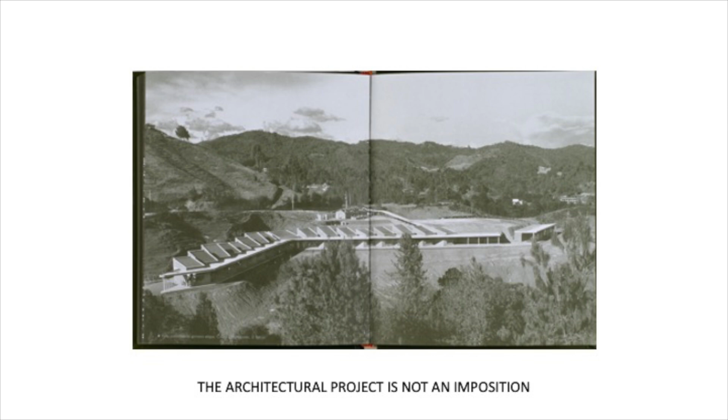It's just the title of the book, Partial Agreements, or Acuerdos Parciales in Spanish. It's proposing or supporting this idea—because it's not our idea, it's more a tradition in architecture—that understands the architectural project as a partial agreement. It's something you have to build with all the people, the ecosystem, materials, situations involved in a specific condition. So what we're saying is the architectural project is not a configuration that we imposed, it's not about our preferences or creative freedom. It's more about a creative commitment with the specific problems you have in that specific moment. The ideas in that book move around that.

The second book was published in 2014, and we had a second publication in 2023. We reprinted it and corrected some of the text, improved it a little bit. But it was just a continuation of that previous idea of partial agreements. So yes, the architectural project is a partial configuration, an agreement, but specifically when that project is located

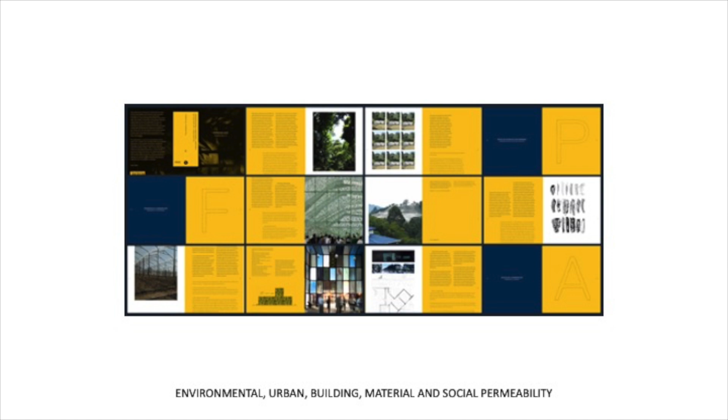inside the tropical belt, or maybe in Colombia, the main quality is permeability in different scales. Why? Because you don't have seasons, you don't have snow. Depending on where you are—Bogota, Medellin, Cartagena—with these different heights, you need different strategies. In Medellin, for example, we don't have this tradition of having AC systems. We don't need it, we don't use it. Only hotels for tourists have those systems, but the rest of the city doesn't need it. So in this book, we try to explain this idea of permeability in different scales as a quality.

So from the urban condition, with examples of how our city is permeable in some areas. When a city is permeable you can walk and cross it, it's different when you have a lot of fences and it is closed. You have different problems or situations, but also environmental permeability, in buildings specifically cross-ventilation, balconies, terraces, all those kinds of spaces, but also materials, how materials can be permeable or porous, allowing humidity or water crossing, etc.

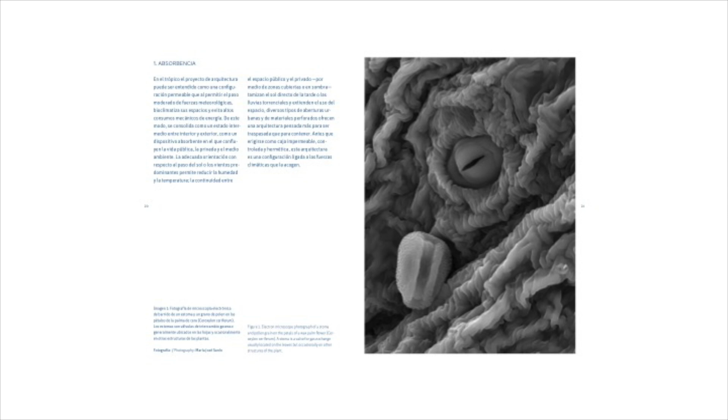Finally, social permeability. For anthropologists it's super relevant, and they define some of the groups they study in terms of how permeable and connected to other communities they are. They connect this idea of permeability with success and surviving over a long period. So we propose a different point of view to understand that concept.

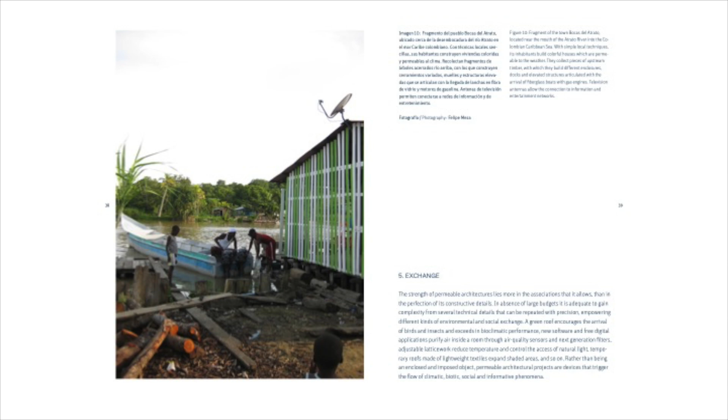So absorbency at different scales. You see the images with different scales. So penetrability, flexibility at this scale, for example, a tropical greenhouse in the mountains of Colombia. So flexibility, availability, exchange, circularity, and convergence. Different scales trying to explain the same phenomena.

Finally, this third book is 12 projects in 120 constraints, and the main idea here is another step, okay? So yes, partial agreement, yes, in the tropic, a permeable agreement, but also in our context, our socio-political context, Latin America, etc., with the history we have and the technologies we have, the limited innovation we have, etc.

We also wanted to accept and understand constraints, but not as we normally do, right? Because constraints, normally we understand them as something that is limiting our capacities or creativity or ways to react to our problems.

So we propose to understand these limitations, these constraints, as a positive expression of the problems you have. In a way, the architectural project is an expression also of those constraints, and maybe our responsibility is to accept them and transform them into creative problems or creative challenges.

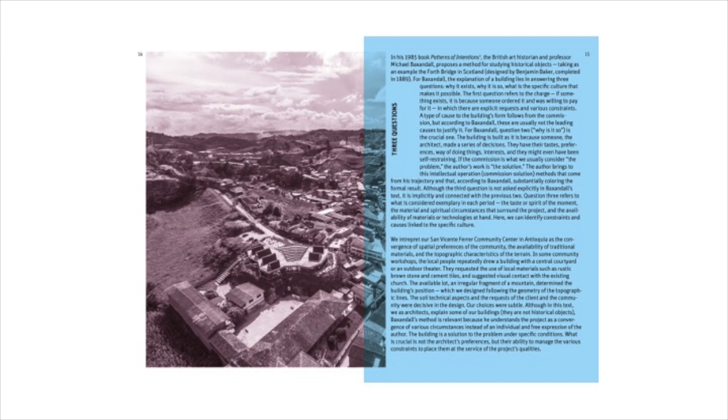So in this case, we analyze the work of other artists, architects, anthropologists working with this idea of constraints. And we have different chapters analyzing the situation: 7 crutches, 5 obstructions, 3 questions, 3 methods, 1 concept, 1 direction, 1 vow of chastity, etc.

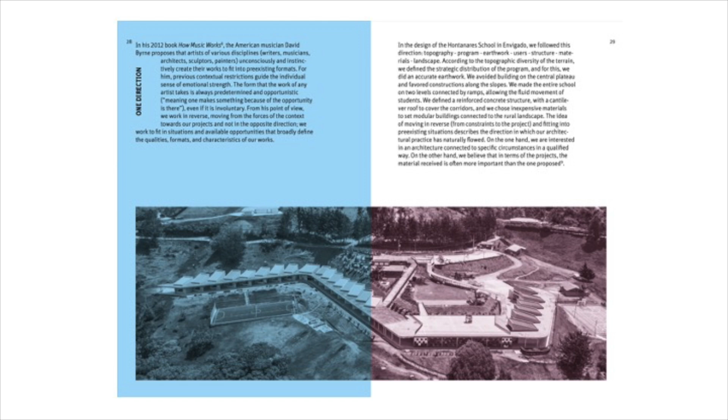So now I'm going to try to explain. Sometimes it's difficult to do it in a super obvious or direct way, but how those ideas are defining or living in these projects. So the first project, I will start from the sea and go up, and I will finish on top of the mountains, right? So you can really understand the projects, and you can see the change of colors, the change of materials. Sometimes it's subtle, sometimes you can really see it, even in the configurations, etc.

There is a street, they have really interesting urban strategies. This public street works as a pedestrian street all days from 5 a.m. to 12 p.m. for people to walk. It is a touristic city, but it works like that. Bicycles, people running, people walking, a lot of festivals, food, etc.

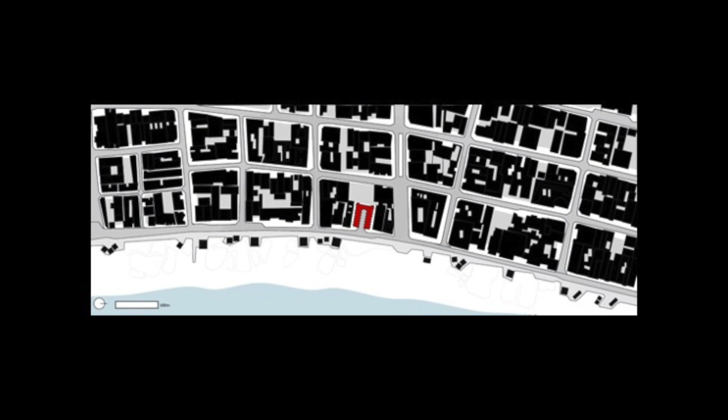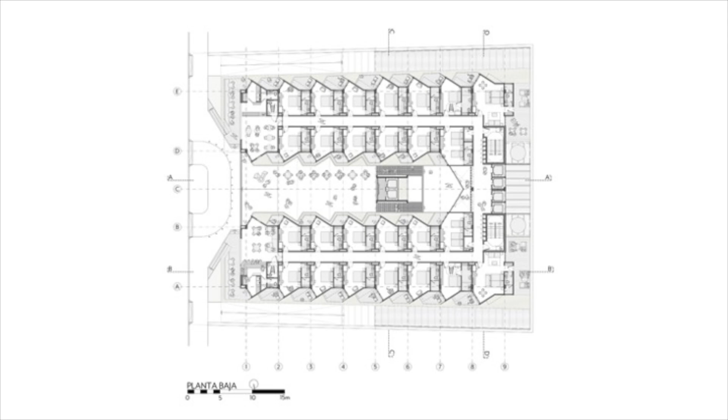And then what we have is a symmetrical building with all the bedrooms arranged with these diagonals, allowing people to see a fragment of the sea. So it's a configuration with this semi-public big space, and then little units with this idea of having the diagonal allow people to enjoy the view.

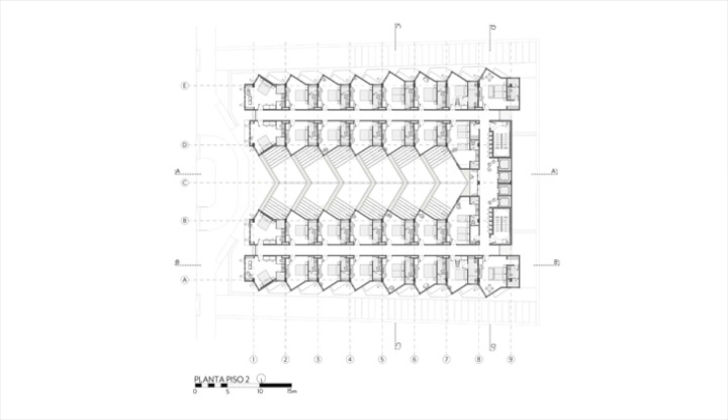Then this space transforms into a big metal pergola with hanging gardens, and on the fourth floor you can take a bridge on top of those pergolas to go to these terraces, to the swimming pool or the restaurant, enjoying the view.

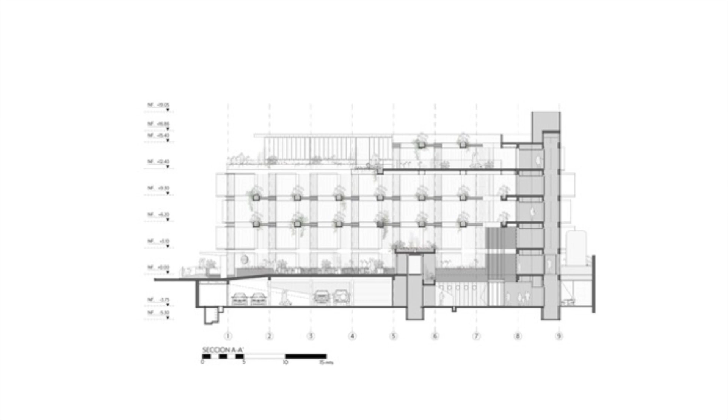So this is like a section. You can see how it's connected with the street. This is the stair you go down here. This is the lobby, etc. Here's the cross section, and this is the building.

So what was the challenge there? What is the constraint? A lot of urban regulations - but the main constraint is cultural preferences of the clients. It's difficult, and we don't take the position where you as architect have to educate your clients. I think it's completely the opposite - we don't educate clients, we work with them. We create agreements, we don't impose. That struggle is where you really have to define the project.

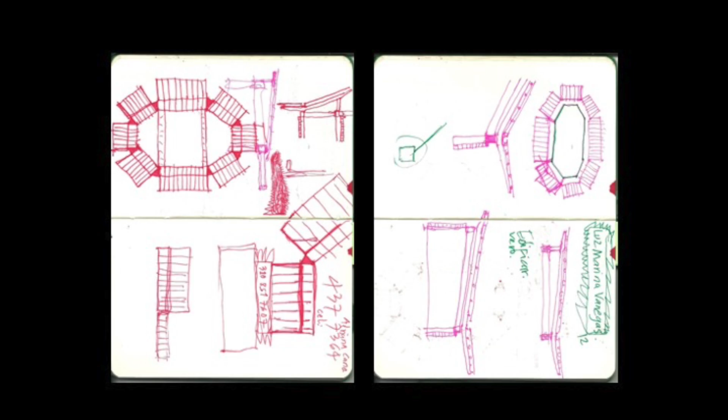The Secretary of Education had a lot of constraints in terms of budget, materials, and structure. For example, the quality of the soil was really, really bad, so they said: concrete structure, only one floor, only one story. The roofs, super light steel, really light. And basically, that's it - make it modular.

We have a partner who is a company building concrete blocks really near this area, so we are going to use all the materials and colors they have - brown, yellow, orange, that's it, thirty-thirty-thirty, and that's it. We are used to those situations.

So we start designing, and they had a soccer field, and one of the main limitations or constraints they proposed is: you have to keep the soccer field exactly where it is. So try to build everything around, keeping this super big space open.

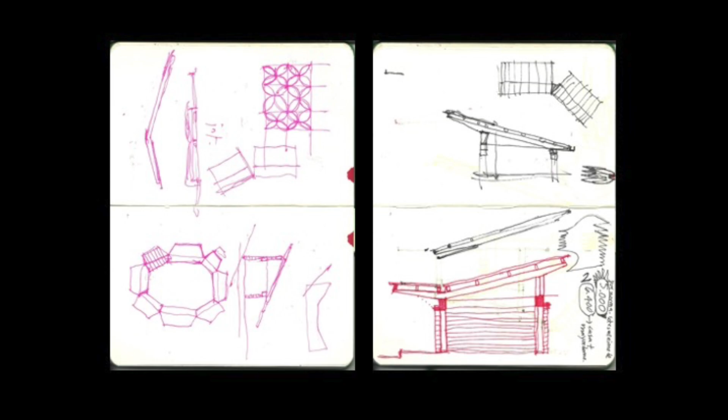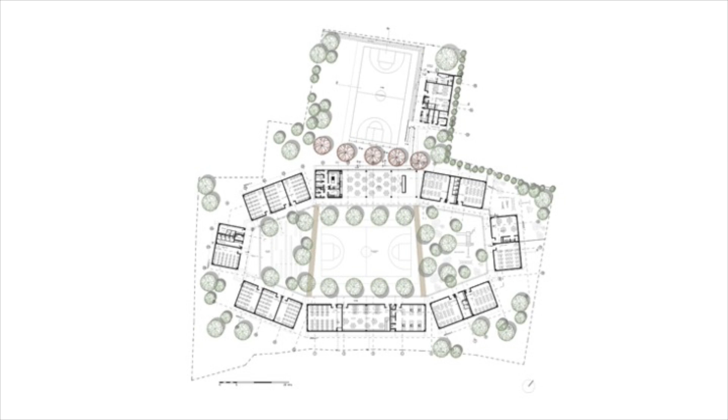So we start working with this idea of having modules. This is the access, the office, a new little soccer field. Then you go down, take a ramp, go down. This is the social area with the restaurant, the cafeteria, and then you have classrooms, labs, etc. You have a corridor inside, and all the buildings face different directions inside the lot, but super basic.

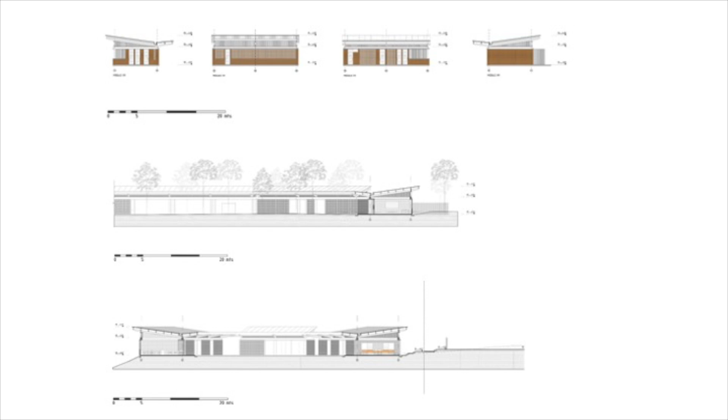Okay, then this is 120 meters high above sea level, also in that area, but a little bit more to the north. So this is less dry, more humid, and this little lot is in the middle of a jungle almost, and this is the Mendihuaca River going down towards the Caribbean Sea, which will be here. So this is a Canadian client and a Colombian woman. They decided to have a second house in Colombia for spending a couple of months a year in this little house. So what they mentioned is, hey, we already bought this piece of land.

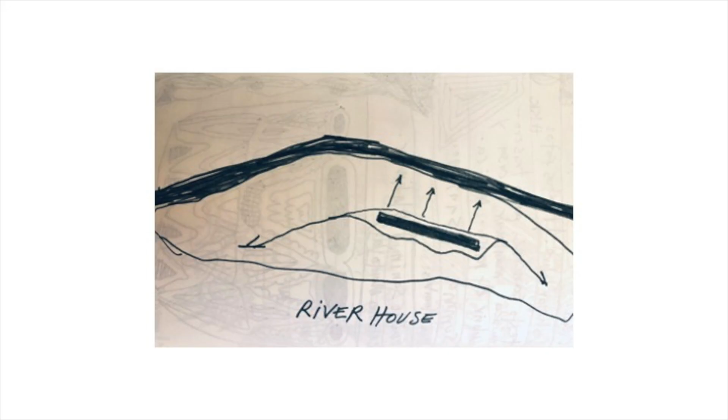So we start thinking about this long house parallel to the river. Immediately we identify this idea of having a super thin house, because you can have cross ventilation along the whole bar really easy because it's super thin. So if you locate the house in the east-west direction and you can have perforations in this direction, it can work really good. So this is the location of the house, this is the access, the parking area, etc.

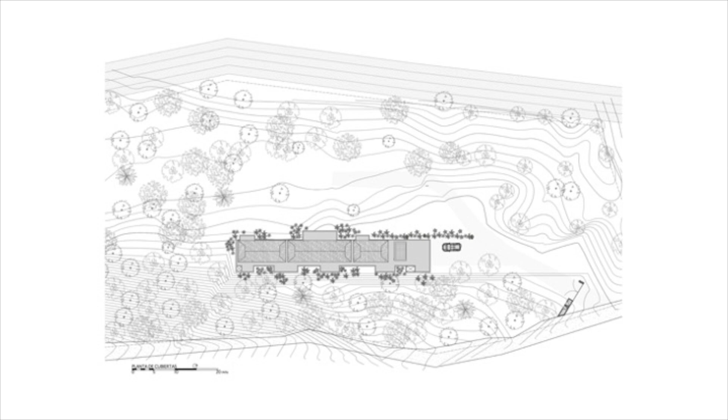And then we have a horizontal concrete base. On top of that, we have 3 different roofs, wooden roofs with palm tree leaves on top, the traditional palm tree leaves used in that area. So you can see the section. We found this flat area already there. We only put the house on top of that, following the long extension. This is like the mountain with a lot of tropical plants, etc.

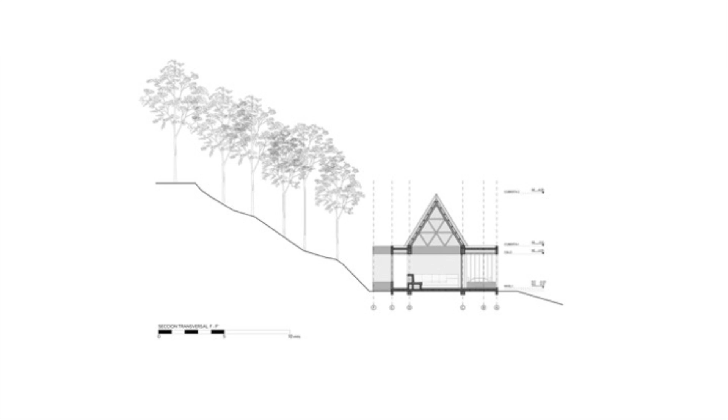So this is concrete, columns and walls, and then these voids, these open spaces, covered with this light structure. And we proposed also these terraces connected with the river. So you can see here the house. You park your car here. On top of this, there is a solar panel system generating enough energy for, I would say, the kitchen and the social area. It's not a lot, but it's something.

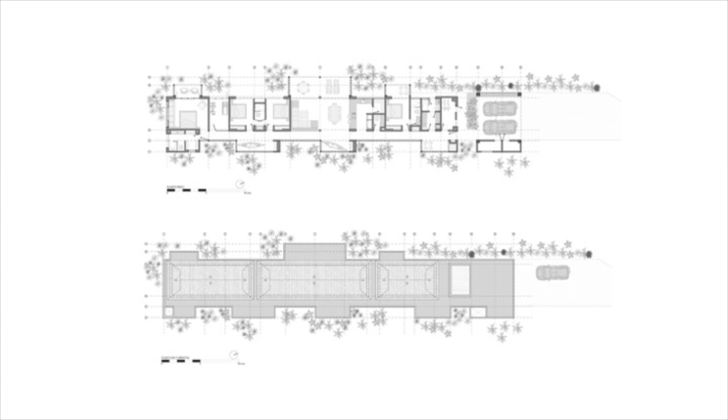And then you have this long corridor and these little spaces for hammocks facing the mountain. But you also have all these, it's like a bread, right? So you have a little room here, then the kitchen, the social space, then more rooms, a little gym, and the main bedroom. All of them facing the river, okay?

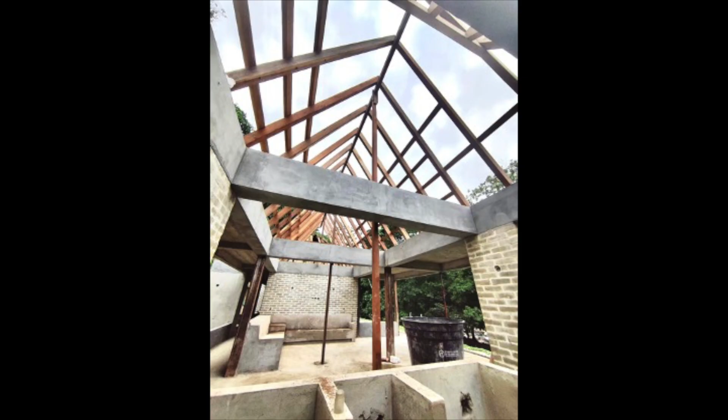Sections. And the construction was completely conventional, I will say. So we have this concrete flat slab with concrete columns, and then all the certified wood that we had to move from Medellin, right? Because all the wood here, if you want to use it, is always an endangered species. We have a red book in Colombia, and almost 80% of the trees are in danger. So this is the typical construction system. We have all the connection with these concrete beams, and then these concrete block walls, etc.

Okay, then going up a little bit more, 1 mile high, it's where Medellin is located. Medellin is a long city located in a valley that moves from south to north. It's like a really narrow, long valley.

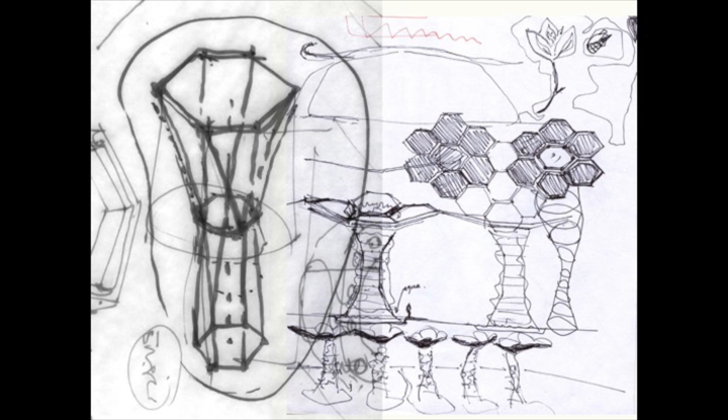We also saw some honeycombs in the area, and we started working with hexagons in plan, exploring patterns of 7 hexagons, with the central one being the patios. We could have hollow trunks where we have rain inside those trunks and real trees or plants growing inside, and then the columns there.

So at the end, we proposed a pattern. We didn't propose a building with a facade, but focused on one of these patterns with 7 hexagons, 1 hollow trunk, a steel structure with overhangs, and all the structural forces in the center, in those hollow trunks, but also the organic forces, because all the gardens are also located there. We're collecting the water, and we have all the electrical systems also there in those columns, so everything, all these forces are connected there.

And then you repeat the module, and you can have a lot of different configurations. One of the ideas was to avoid touching the existing trees, one of the limitations or constraints. This was a configuration with 15 modules, but finally we only built 10. That's what's really interesting about this system, because it's basically the same, you can make it stronger if you repeat the pattern.

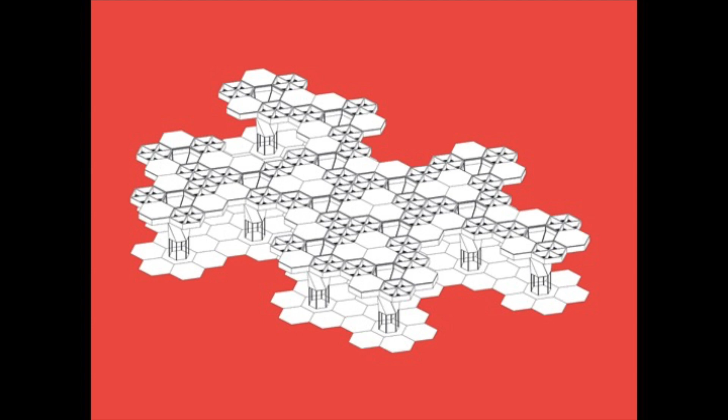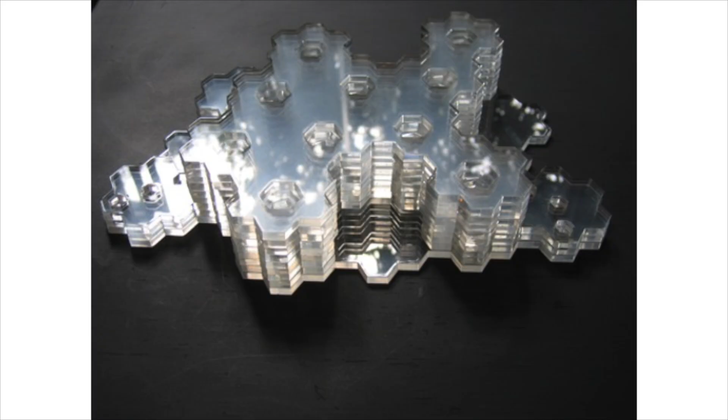Exploring possibilities, we also started thinking it would be nice to have these patterns like a vortex, explaining that all the forces, the organic but also the tectonic forces, are condensed in those areas. We did a lot of physical models, and then started working with the plan. We proposed 3 lower office buildings, one with bathrooms, classrooms, restaurant, offices, and then these concavities as access and a lake.

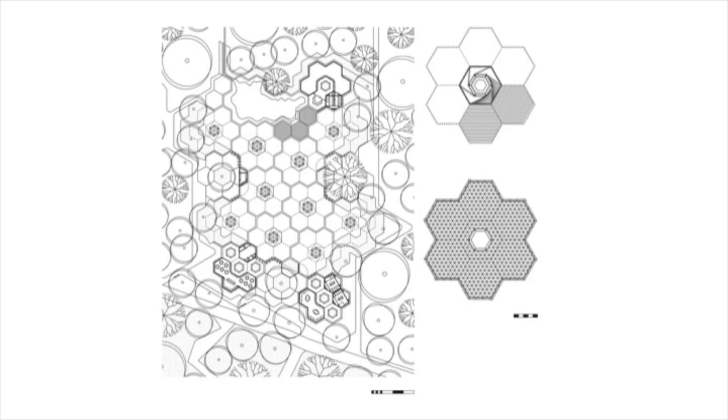So you have this concavity, which you can access from different areas of the botanical garden, etc.

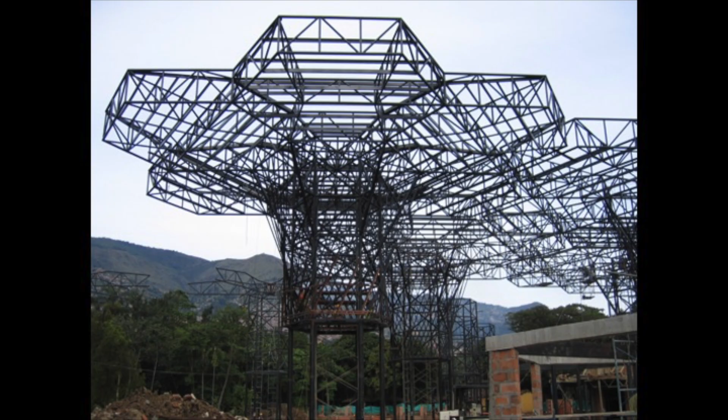We also studied the scale, using certified local wood, patula pine wood from certified crops near Medellin, and a steel structure to build it really fast. Nothing is bolted, everything is welded, because it's cheaper and easier for our local builders.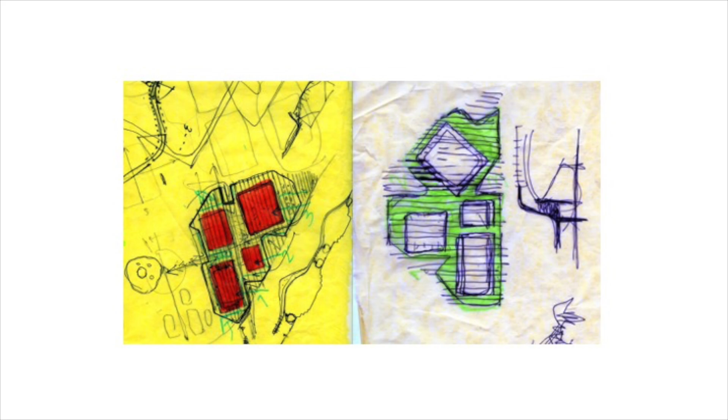So we said, okay, we need a system, a structural system. We need to build trusses that we can build in 4 different spaces at the same time and then move them to the place.

So what we did was propose stripes in this east-west direction. You can see it because the soccer fields always have these areas in the north-south direction, because otherwise it doesn't work. So we have parallel stripes that you can extend east and west so you can control the sun in the afternoon.

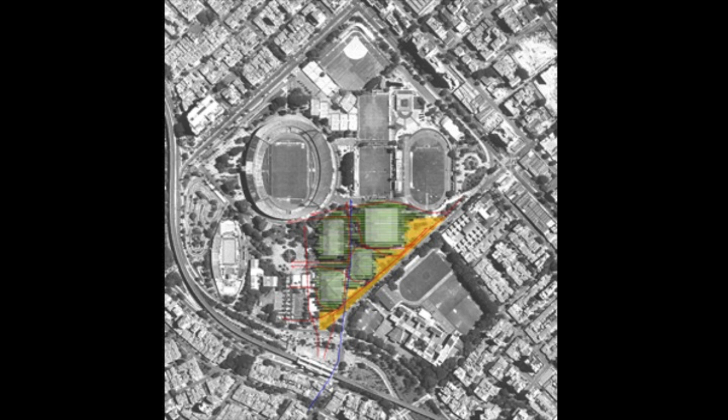And the sun during the whole day, basically. But then you can open these north and south facades because the main air currents in Medellin flow in that direction, so we have a perpendicular diagram, extending and repeating the stripes north and south, then changing the altitude or height depending on the interior spaces. For example, volleyball has a regulation of 14 meters empty, combat sports need 16, and this building was taller.

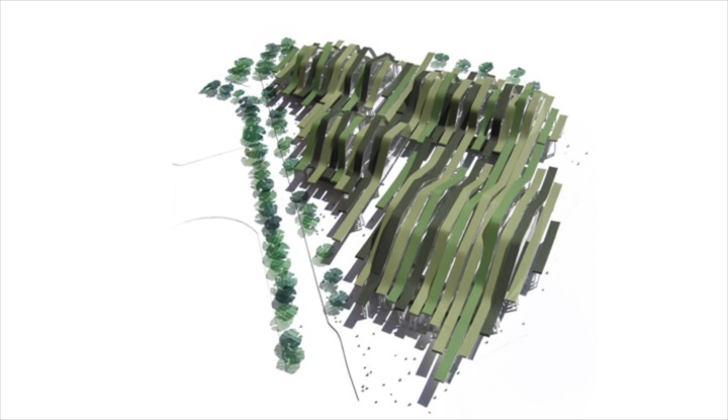So we created this new continent, like a strange Africa, connected in that way, but you can cross it. We did a lot of models. We created this skeleton connecting on top of the concrete stands, but keeping the south and north faces open so you can have cross ventilation.

Again, no AC systems. These are the trusses we designed with the structural engineers - different shapes, but also almost the same logic and structural patterns. You can see how it works in the cross section - we collect all the water here, we have all the electrical systems, and indirect light on these faces.

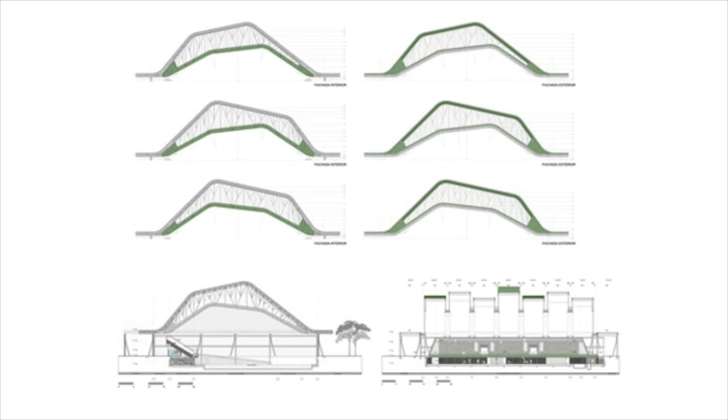Now I'm going to show you also Medellin, but this is the challenge again of something that is private, okay? We have these investors, we have in the urban tissue of Barrio El Poblado in Medellin, we bought this land inside of a block, but crossing the block. So they bought one of the lots in the corner and the other one crossing the block from one side to the other.

So we immediately said, hey, that's the idea. You can have a permeable building, urban permeable building. You can cross the block. You can create different pathways for local people. It doesn't matter that they are not clients of the hotel, but they can use the restaurants. Now they have a gallery, 3 restaurants, 2 lobbies located at the same level. So yeah, we worked with that idea.

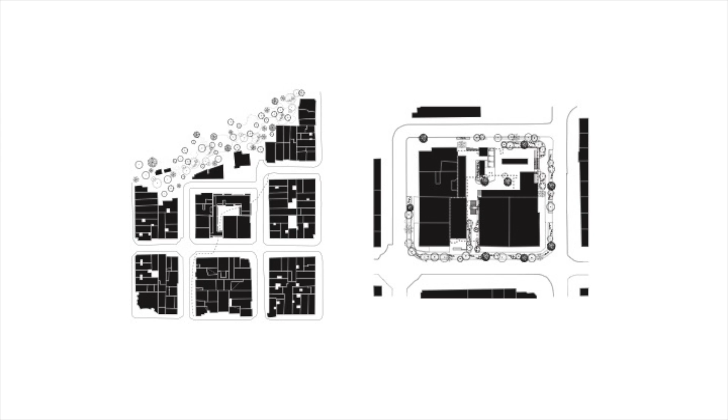And then they had this idea of capsules with different sizes. So the client proposed having 17 different sizes for different units. So we had to work with different ones, you can see it, 1, 2, 3 - all of them are basically different. This one is bigger, and then to design something super specific for all of them.

And following the regulations, because we have 2 lots in the same block with different urban regulations. So part of the building is 8 stories, the other one is 5, etc. It was like a really complex situation.

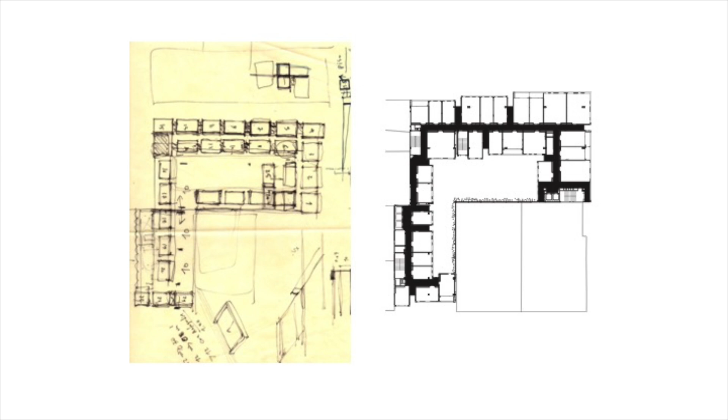So this is how it looked. You cross this, you go up, you use the patio, but you can go out here or here, you can access from the corner, etc. And then just this crazy combination of rooms, corridors, etc.

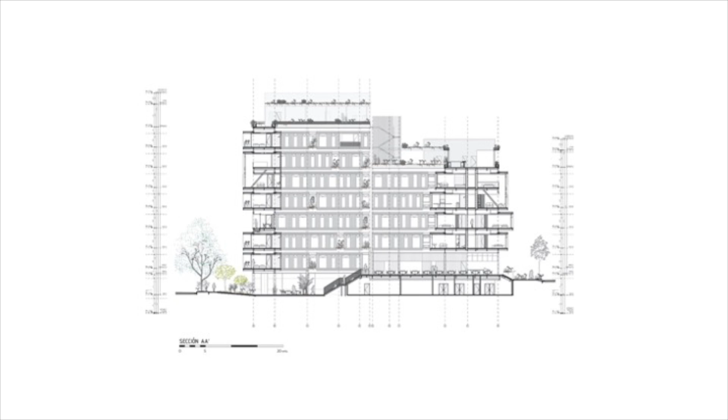And we had to work with the landscape designer really, really closely because they wanted to explore this tropical component. So only native plants, local plants that in 4 years have grown like crazy. So now the building is almost invisible, which is great because the building is really abstract.

The client wanted to have this idea of this metal structure, super resistant, that is going to last for 150 years. They proposed it's not black, it's more like a graphite color. It's almost black. And they said, okay, this is the color, there's nothing to discuss, that's the color.

I don't like it completely because when you paint a building in that color, it's really difficult to create shade. The shades are not visible, so it looks flat. But actually, it is not - it's really three-dimensional. But we accepted it, and we worked with that. Sometimes I like it because the building looks like a big shadow.

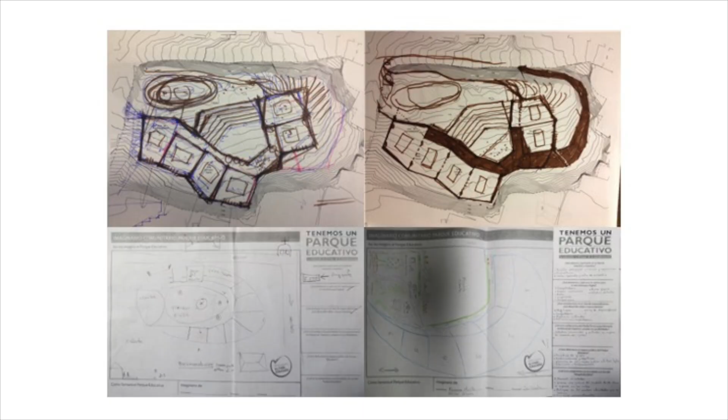And again, a lot of constraints. Structurally, the soils were a disaster, like a fragment of a mountain that was already cut. So the structural resistance of the foundation was really limited because of how close the concrete piles were to the edges of the mountain. So only one story, a small building.

But what the municipality wanted was to have a little public space in a place with no space for that. So we had to work a lot. We created this stand, or open outdoor theater. This is a cold place, super windy, super rainy. So what we decided to do is have a space inside, and the building works as arms covering that space from the wind, from the air currents.

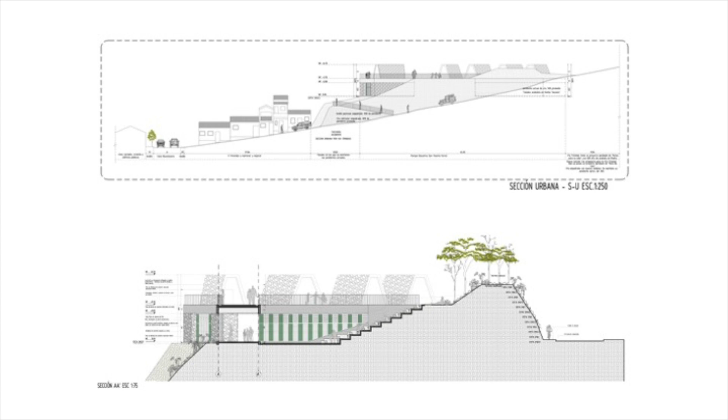And then you have a public cycle. So you start here, you can walk. This is the ramp for the access. This is the lobby, and then you have the outdoor theater. You have 1, 2, 3, 4 classrooms, a lab, etc. But what you can do is go outside here, go up, and then you are again in this street and sidewalk. So it's like you have a loop.

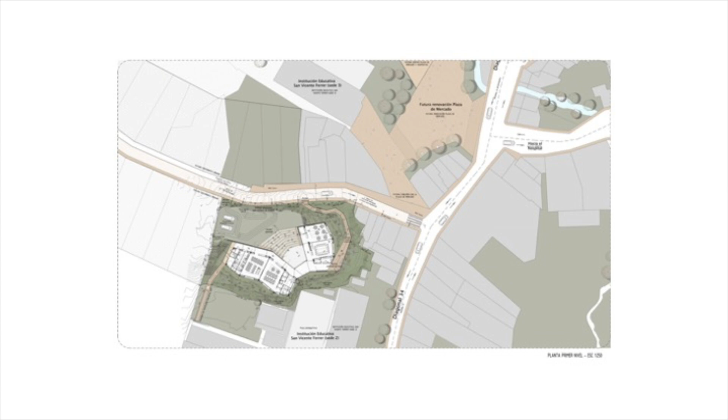And then on top of the roof, you have the terraces to create or duplicate the public space. Some of the details, I think it's not so relevant now, but basically we have an outdoor gym. You can go up here, take the ramp, cross the building, go up, and then use the terraces to connect the building also with the local school or with the church that's visible from these terraces.